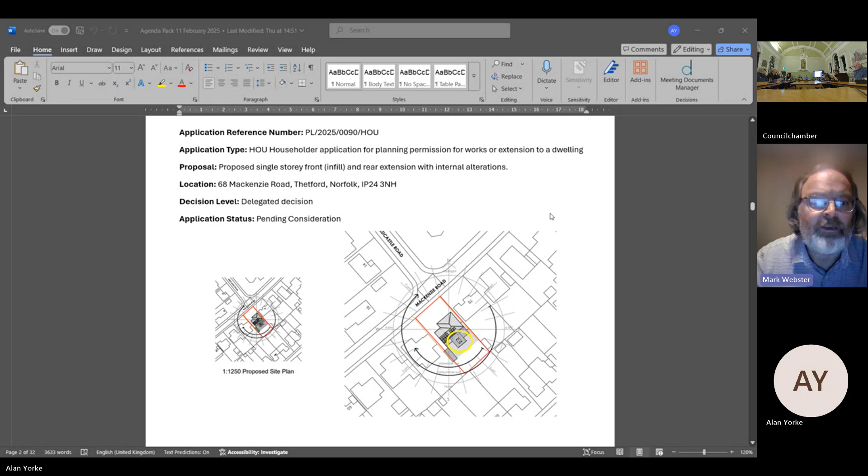Yes, please. So this one is 68 Mackenzie Road. It's a householder application for a rear extension and a small front infill extension, plus some internal alterations. If you are wondering what the round lines are, that's the sun apparently at different seasons of the year. So that's putting it into context there, Mackenzie Road, on the corner of Redcastle Road.

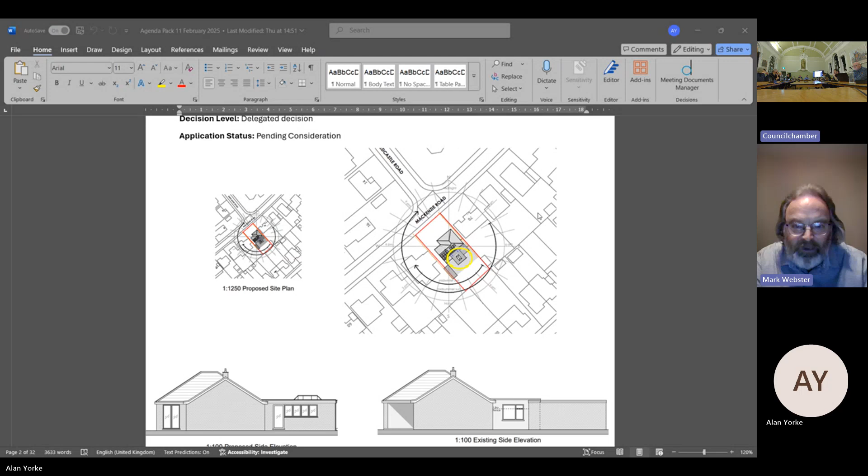If we can have a look at the first set of drawings - apologies, I've put the proposed on the left rather than the right as usual, so it's the other way around to what you're probably expecting. The ones on the right in this case are the existing status. Also, somewhat confusingly, the garage behind the house to the right seems to have disappeared from the proposal, but it isn't actually disappearing - the proposed diagram is in effect a section through the building, so it's not showing the garage, which would be in front of exactly where the cursor is.

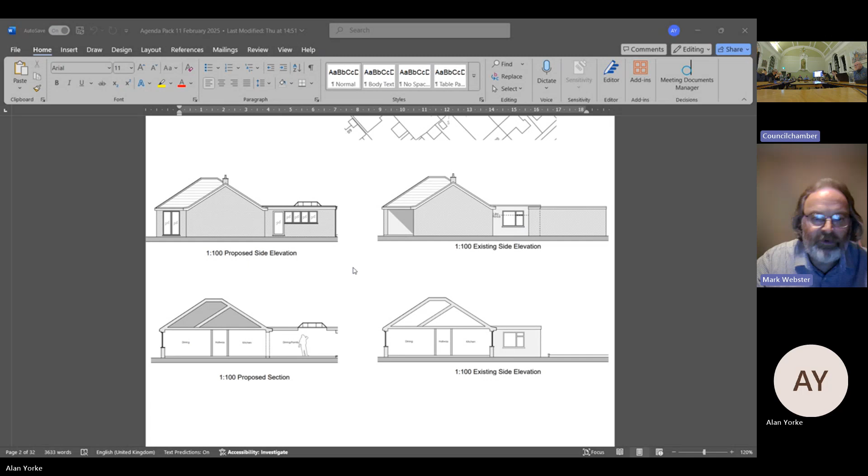So the extension there at that point is that bit on the right, and you can see the sections showing the proposed section with the larger extension on the back of the house, on the right of the left hand side drawing. Okay, if you're happy with that, we'll go on to the other ones, which are the right way around.

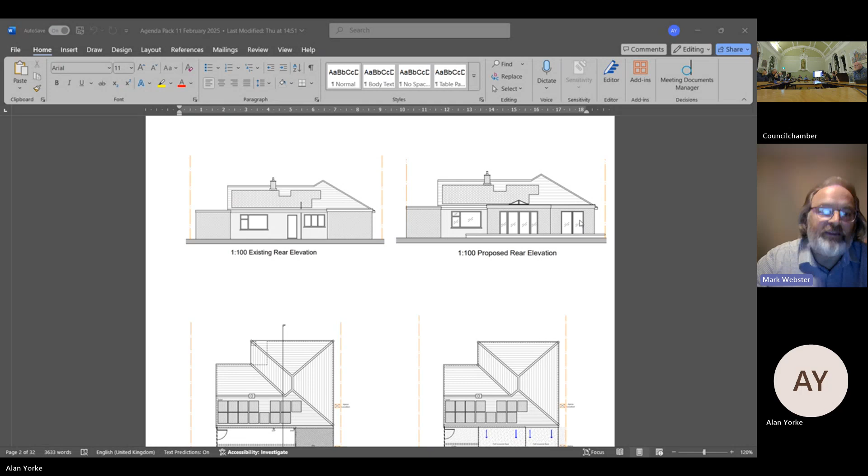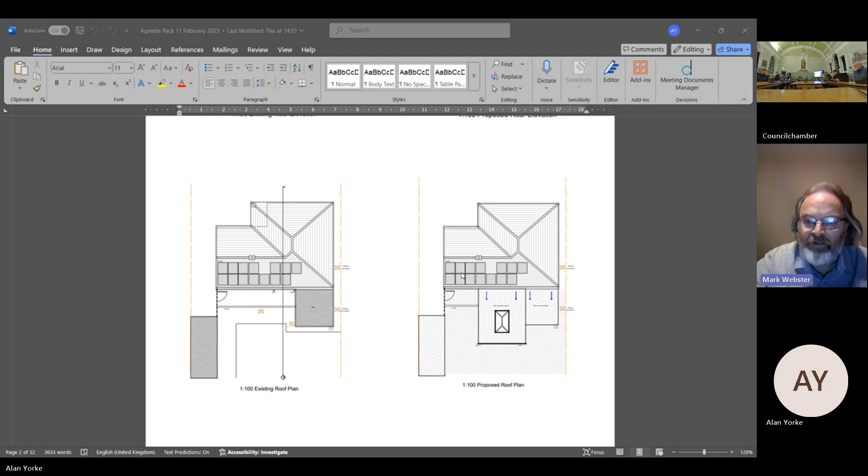If we go down to the roof view, you can see the existing extension - sorry, is somebody trying to say anything? Shall I continue? Okay. Sorry, it's just some interference or noise, I guess. So on the right-hand side of the square there's the existing structure or extension to the house, and bottom left the garage again, and it's the bit in between with the roof light on it that is the proposed extension.

So generally speaking, materials to match existing. The floor plan there, the bottom middle is the new bit, which is a family/dining room. So I think that may be it - let's just check if there's anything further. No, that's it. I'm back to you, Chair.

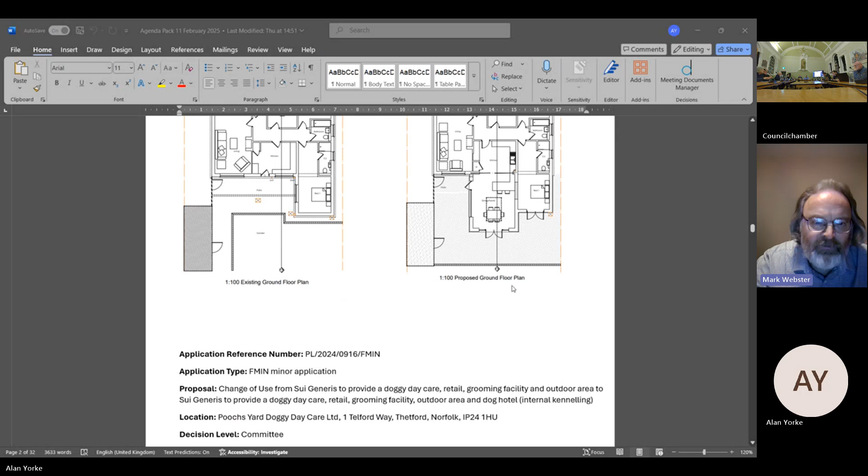0916. Thank you, Chair. So, this one is the doggy daycare centre.

It is a change of use in the sense that they want to be able to have dogs there overnight - dog hotel, kennelling facilities. It's worth noting this is going to committee at Breckland purely because they own the building, it seems. So it's a committee decision, but sent to committee because they own the building.

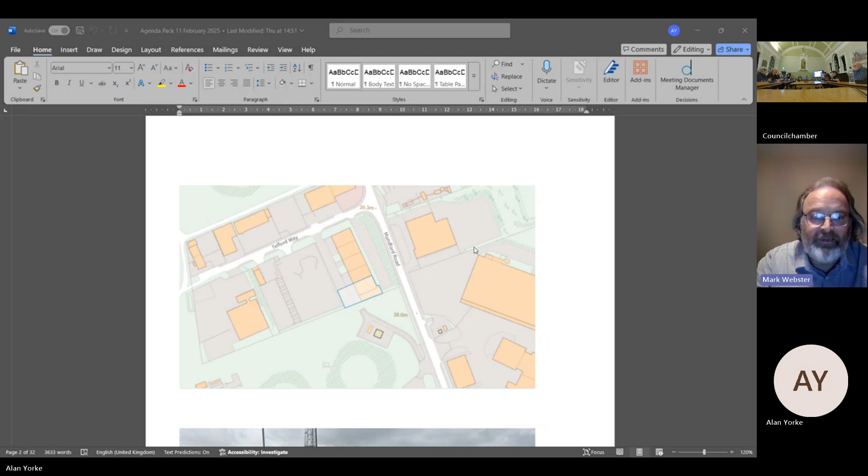This has been approved at Breckland already. Just to hold on that, Mark - apparently this has already been approved at Breckland. Oh, okay, so possibly not making a comment then. This is to consider for information, I guess.

Well, it's good information. I guess from a town perspective, it's great to see a growing business that's identified a gap in the market. But are there any other comments on that at all?

Planning last week, it was passed last week. Passed last week, is it? Breckland planning, yeah, it came up. Okay, thank you - I think just out of courtesy, we'll say we'll pass it as well.

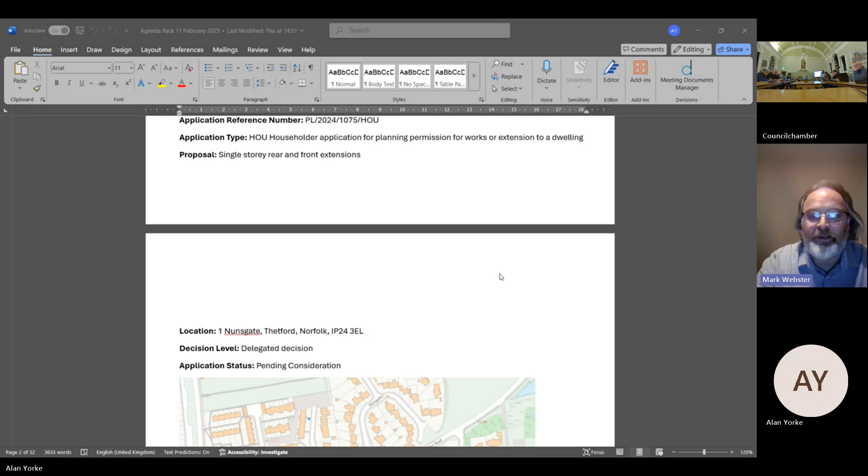Sorry, Mark, it's the number 1075. Thank you, 1075, yeah, okay, check. Yep, so this is back to a householder one - a single rear and front extension here, Number 1 Nunsgate. So this is basically a corner house.

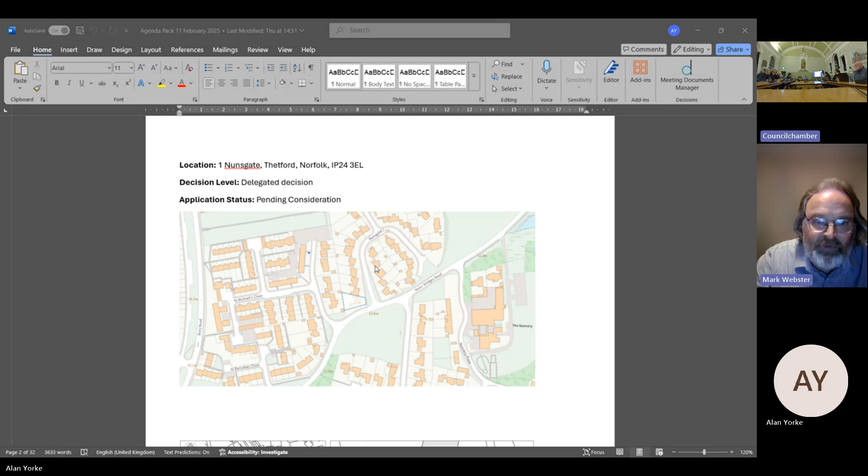So can we go down just to the map now? So the plot in question is again the blue area there on the corner of Nunsgate and Nuns' Bridges Road. If we could just go down to the next one, please - this one highlights the area in question.

Now the proposal is for the extensions marked in red there. So I'd ask you to note which way round things are, if you haven't already - the smaller front extension there is the east elevation or east side, and then west side for the rear extension.

The other thing to note at this stage is the tree to be removed on this plan, marked in red, that they are proposing to remove for the convenience of that driveway - that is the one with the tree preservation order on it. There is actually another tree to be removed, amongst the clump on the top left, and I haven't really been able to get a good picture view of that because it's in the corner of the garden. But we will see the tree with the tree preservation order that they are proposing to remove for the driveway a little bit lower.

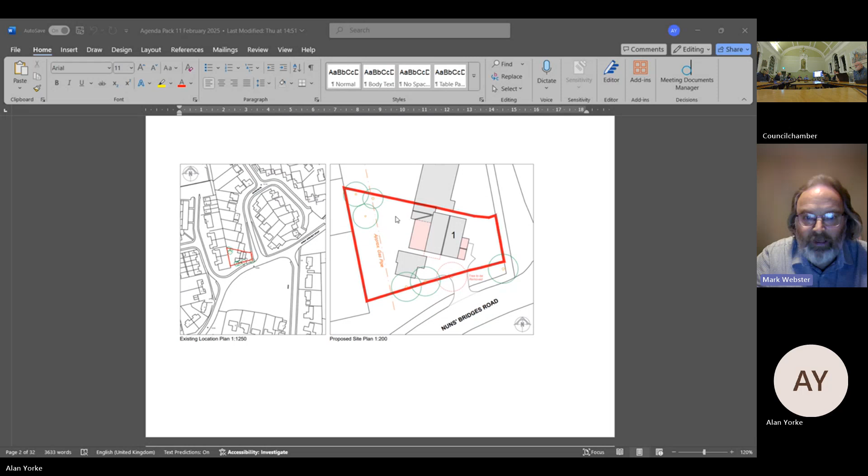So can we now go up to west, which is the opposite view, the back. This is where the larger extension is - again there's a roof structure right across the back there, exactly where the cursor is now. So that's showing the rear extension to the building. Let's go and have a look at north and south now - these are the sides of the building.

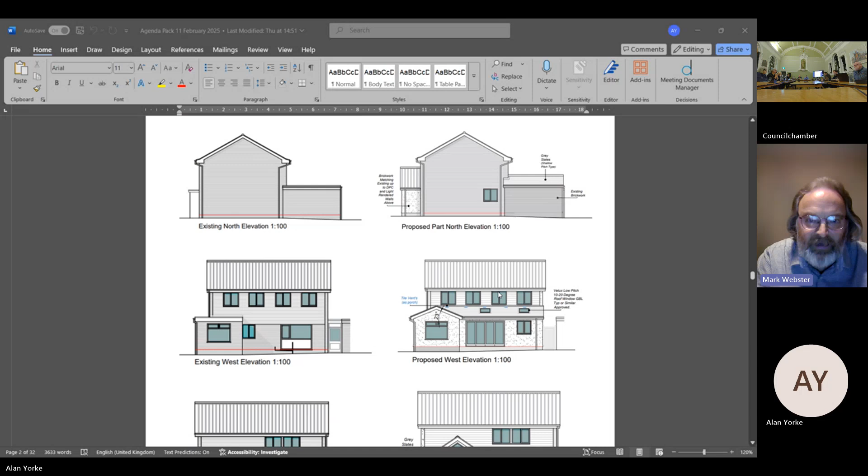So you've got your front there on the left, and if we have a look at south, you'll see it from that's the other side. Basically you've got the front extension on the right there, the porch, and the rear extension on the left going right across the back of the house.

Okay, can we have a look at the plan? At the top there you can see the existing layout with the garage sort of top left, and the existing extension on the top right. The proposal is to add in a bit all the way along the back, top left of the plans, and also add an entrance lobby at the bottom there of your picture.

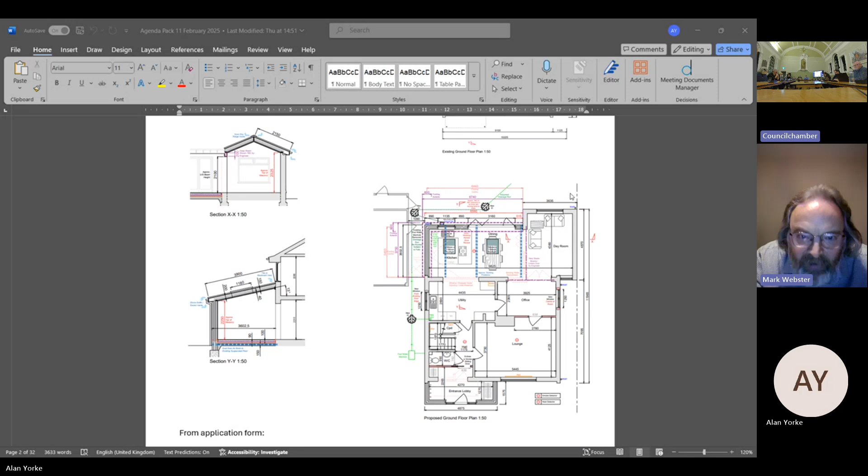Those sections there, you can see XX and YY. If you look carefully, YY is the rear extension, which goes across the rear extension, and XX goes across the top right section there. So that just gives you the roof sections basically of those.

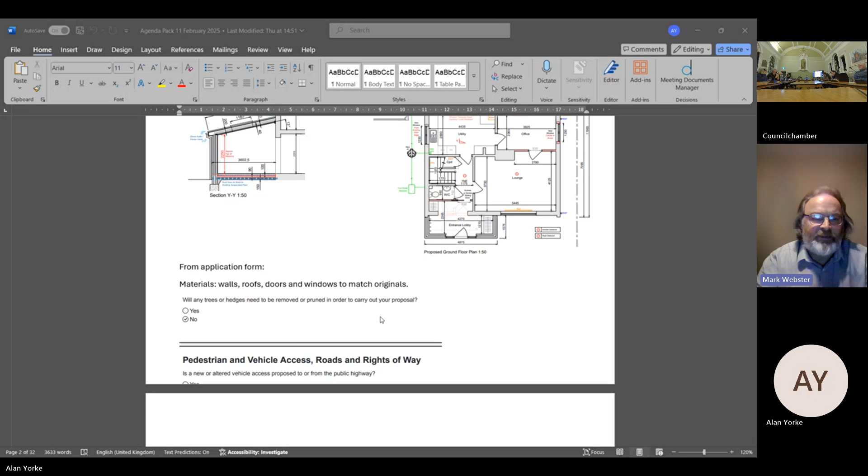On the application form, it asks whether any trees or hedges need to be removed or pruned, and they put no for this, which is rather confusing. I'm not sure whether that's a mistake, because it is basically a false statement as the planning application is currently submitted, since they do say they want to remove a tree. So I'm not sure whether that's just a mistake or an effective admission that it's not a vital part of the proposal. But it does say they don't want to remove a tree, though the details say they do.

Similarly, on the pedestrian vehicle access section, you can't see the answers, I'm afraid, but they're saying no alteration to that, though there does appear to be on the plans some alteration, in the sense that it's being moved to the area across where the tree currently is. So it is moving slightly. Highways have not got an objection to this.

On the applicant's own tree report, the proposal is to remove trees 2 and 7. Tree 2 is the one in the top left of the garden as we saw on the plans, and tree 7 is that one. Tree 7 is the pine tree that we circled in red, which has a tree preservation order on it.

They've listed their reasons that at some point in the future this may cause problems for the building. They also say the branch of the pine tree is touching the house, or one of them is, and it might cause a problem for the driveway at some point. The tree officer, however, is not in agreement with their report, and simply says he's unable to support this because it is a tree preservation order protected tree. I think that's everything on this. So back to you, Chair.

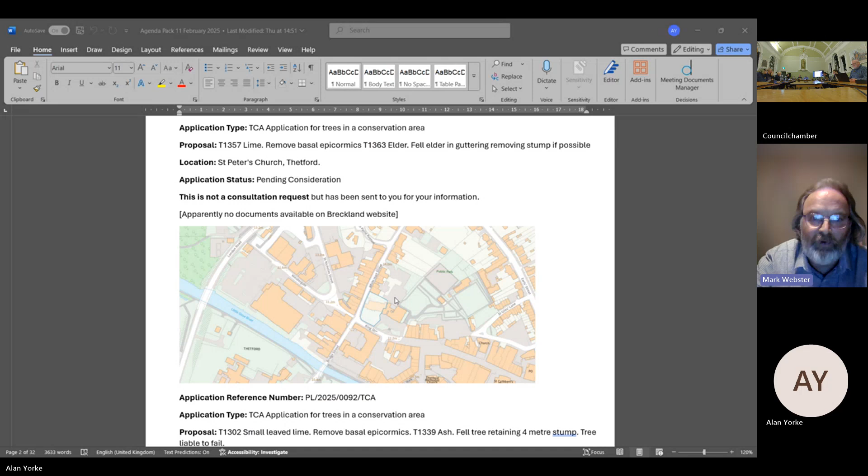And the elder, as it says, is in the guttering, so that locates it quite well. If anyone's not familiar with it, basal epicormics is that kind of bushy growth from around the bottom of a tree where it's been damaged by strimming around the base - it sends out lots of tiny little shoots. So it's basically removing those shoots from around the bottom and removing the elder from the guttering. Do you want to ask for comments, Chair? As I say, you're not allowed to actually influence this as such, but if you want to discuss it, over to you.

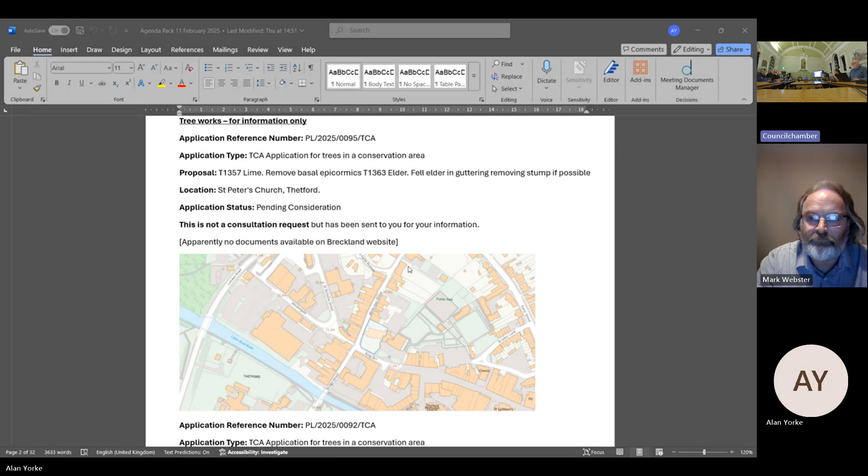Just for completeness, I think we'll give each one individually a thumbs up or down if we can. So on that first one, are we quite happy? I would, no objections. Thank you. Okay Karen, thank you.

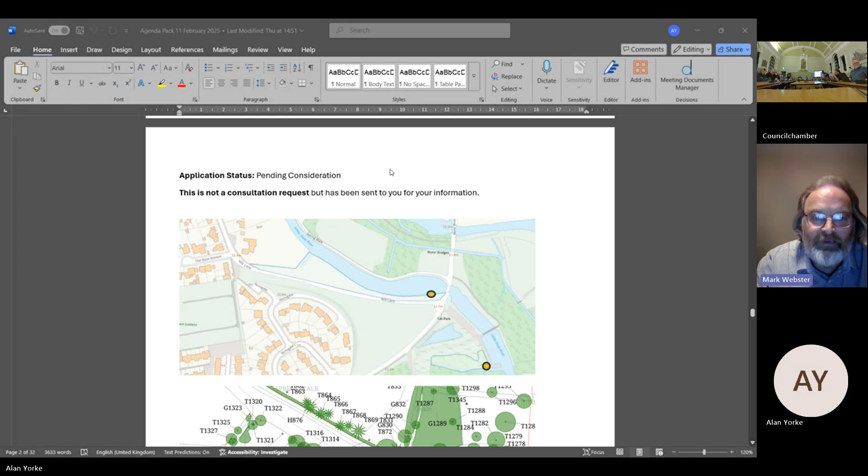Next one is Spring Walk, so you've got two here - another lime tree removing the basal epicormics. Can we just go back a second, Alan? And the other one is an ash which is to be felled leaving a 4-metre stump because it's liable to fall. If we just go down to the map - the one right near the actual bridge is the lime, and the one by what some of you will remember as the old swimming pool is the ash.

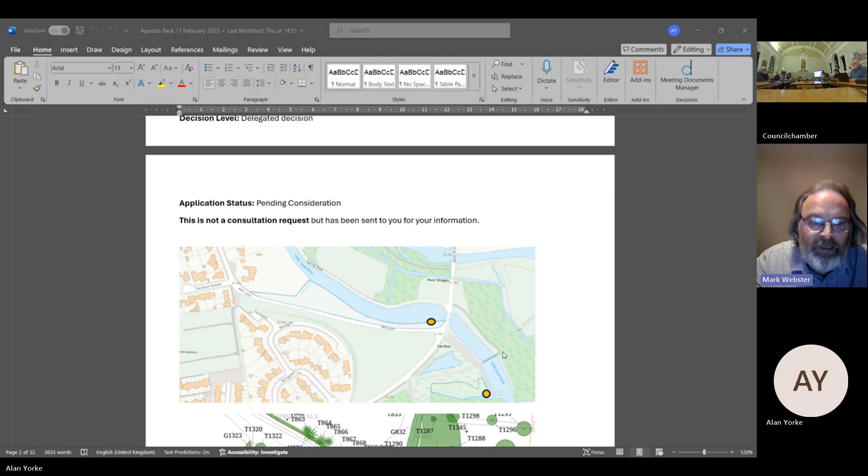So if we go down to the tree plan, that's the lime marked in orange there, just right by the one nearest to the bridge. This is from the tree safety report - the top one there is the small-leaved lime epicormic growth, and if we go down a little more, you'll see the ash, as I said, by the old swimming pool, and you can see it's got die-back throughout its crown, so they're recommending a 4-metre stump fell. Over to you, Chair.

Any comments at all? No, everyone's quite happy. I would make one comment, and that is we've lost a lot of trees down that walk. Each time we lose one, I'd like us to see if we replace it, not necessarily like what we lose, but something more suitable to the environment. I'd like to make that comment because otherwise we just lose so many, particularly down Spring Walk. Is that okay? Yeah. Yes. Okay.

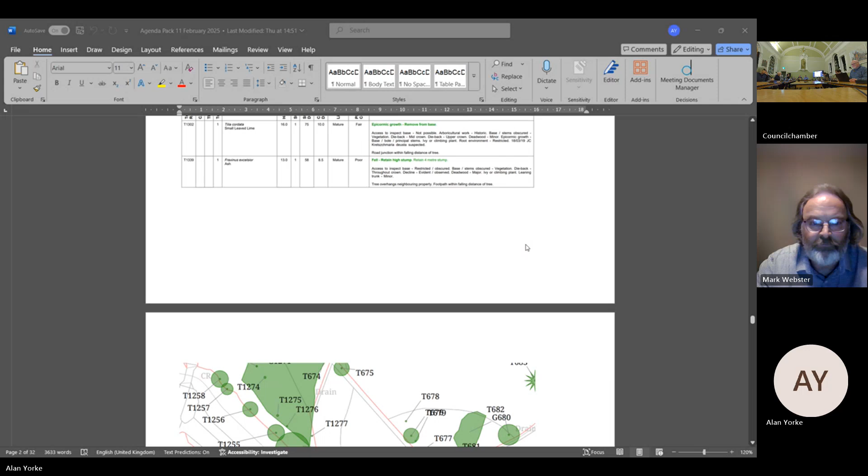Back to you, Mark. Well, yeah, sorry. So if we just go back to that picture, because that does show the lime tree by the bridge, and that shows quite clearly the epicormic growth. We're looking at the stuff around the bottom. So this isn't a fell in this case. The ash, however, is a fell, and that's off the road, so I'm afraid I wasn't able to get a street view picture of that one. But if we go on to the next one, if we can.

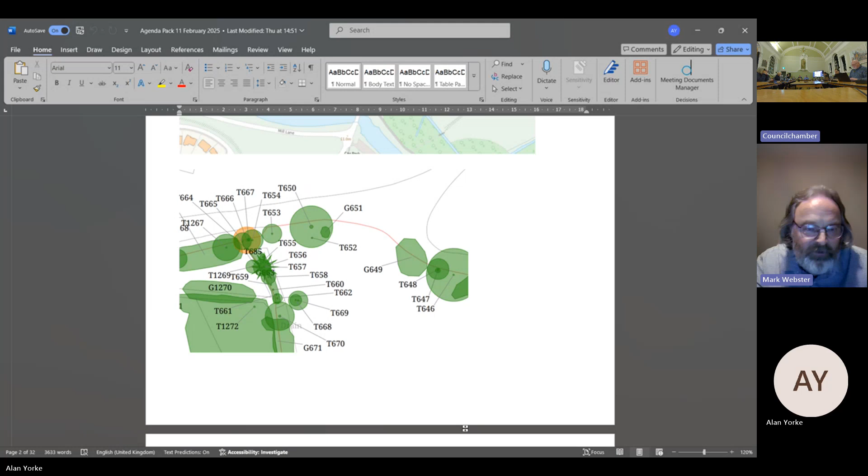So this one is Ford Meadow, and you can see it's just a little blue square there. We're talking about the south bank of the Thet in this case, rather than the Ouse, and it's basically opposite the care home there. We'll go down to the tree plan, the next diagram. It's just showing the one in orange there, near the river. It's quite difficult to get the context from that, but hopefully the previous map tells you roughly where we're talking about. If we go down a little bit further, in this case it's just epicormic growth. Back to you, Chair.

Any comments? No, I support that. Thank you.

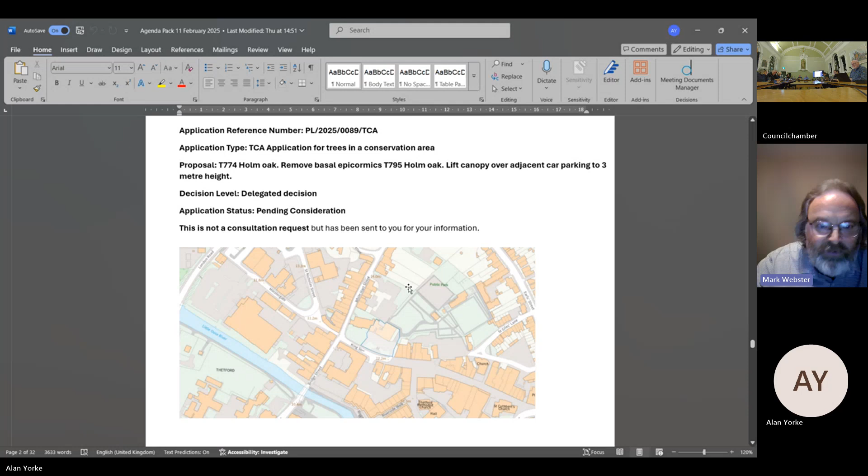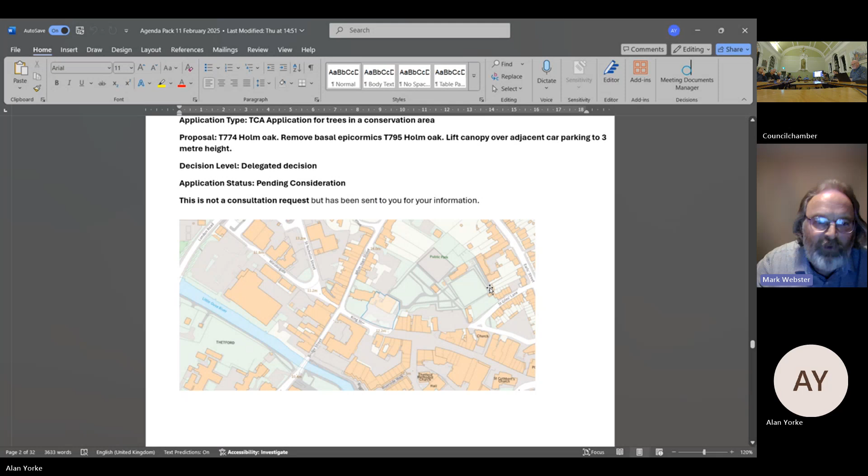Okay, so another one here, and in this case we are talking about King's House. There are two trees in question, both holm oaks, one just behind the building and one in the front car park right adjacent to the shop. If we could go down to the next? Is there anything further on this? I can't remember whether we got any.

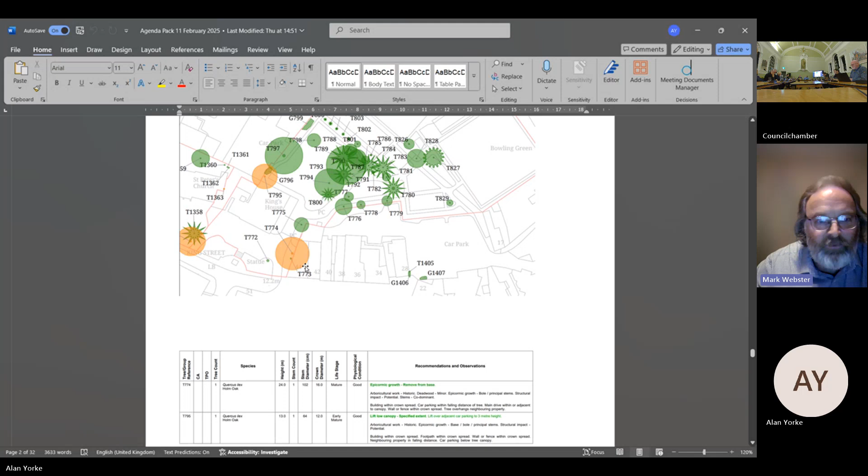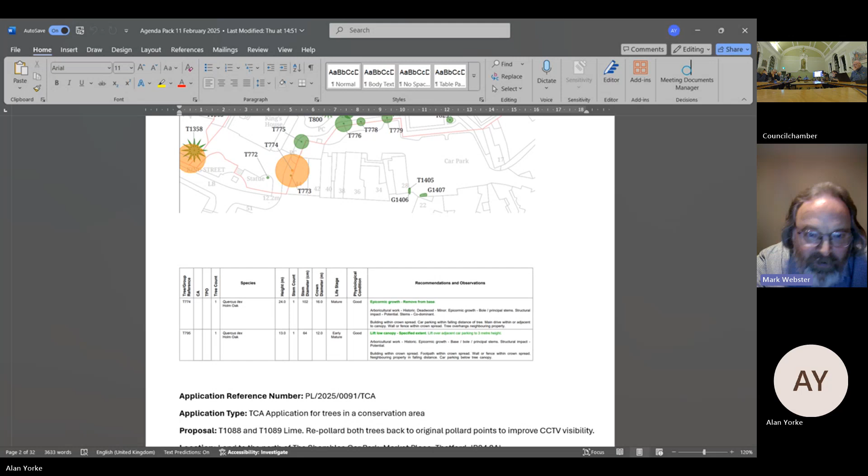Yeah, so we've got the orange ones there. 795, just above King's House, behind the building, overhangs onto the White Hart Street car park. Then the one at 773, bottom right, is the one right up against the wall of the neighbouring shop. That picture also shows the lime next door in St. Peter's churchyard. So in this case, 774, sorry, the one by the shop is removing the epicormic growth, and the one behind King's House is lifting the low canopy, taking off the lower branches to increase the height of the crown. I think that's all we've got on that. Back to you, Chair.

It seems like sensible maintenance of 2 oaks. Any comments? All happy to support?

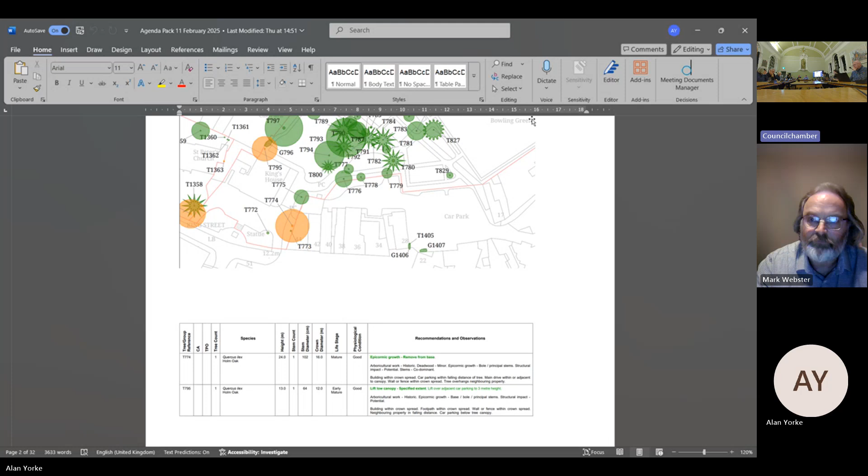Oh, sorry, can I just check, Mark, from a planning point of view, tackling the epicormic growth, is that purely because these are TPO'd? If they weren't TPO'd, would they be able to cut that back without going through a full process? Yeah, it does seem rather bureaucratic overkill. I think it's because they're in the conservation area, so pretty much any work, in theory at least, should have a planning application. But for just removing these little regrowth stems around the bottom, it does seem rather over the top for it to be a planning matter, I should say.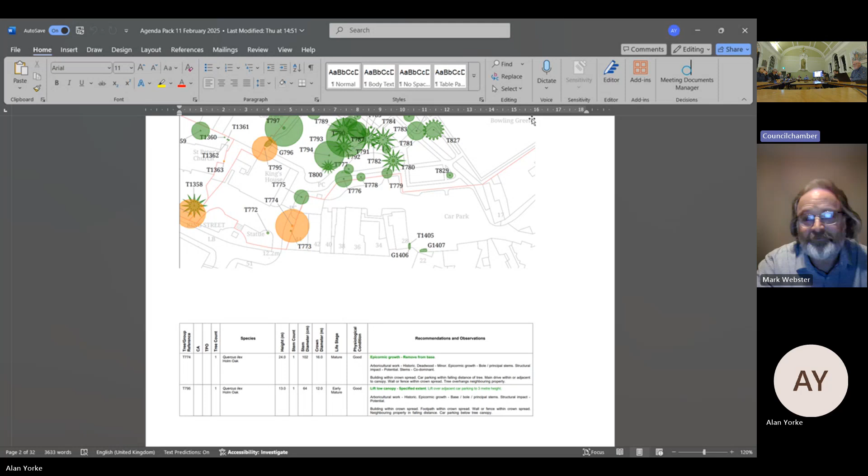Expensive. Okay, if we're all happy, we'll support that. I think there's one more.

Well, there's actually one more Thetford one, Thetford Council one, which is the marketplace car park. Basically, there's a couple of limes that they're suggesting to be repollarded to where it's been pollarded previously. Is everyone familiar with pollarding? It's cutting back the branches to the stem, basically, and it'll regrow from that point. Again, because I can't see the documents, I'm not sure exactly which two, but you know where it is, and it's supposedly to improve the CCTV, so you can probably work out which two it is from that. Back to you, Chair.

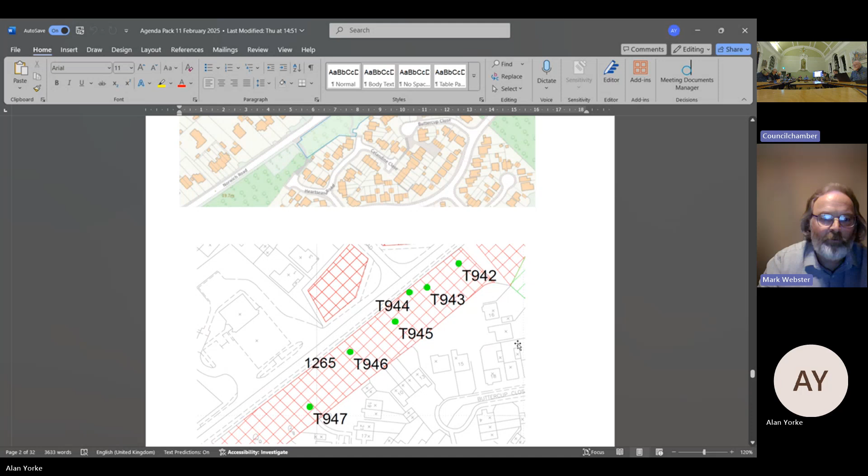You can see basically they list the reasons for the works in each case. The only comment I'd make is there seems to be a number of cases where they fell tree to the ground, and I'm wondering why they're not reducing to 4 meters, which in one case they are, and on one of the previous ones near Nuns Bridge, as it was. So that one's being reduced to 4 meters, but a lot of them are fell to the ground, and I'm not sure why that is particularly. If the tree is dead, they obviously want to reduce it to a safe level. I'm guessing these may be next to well-used footpaths, but from the plan and the information I can't be sure unless anybody else knows the site in detail. Back to you, Chair.

Thank you, Mark. The whole area runs along the side of the Norwich Road and is interwoven with footpaths, so that may have some implication. There are also beech trees which are different, I'm not sure if that has any bearing. But I would make the one comment from my point of view, which is lots of trees being taken down and not being replaced. It's good to see some maintenance happening there because it's been left overgrown and unkept for a long time.

So are there any comments at all we'd like to add? Are we content just to note that there's no notification of new trees being planted? Happy with that? Thanks, Mark.

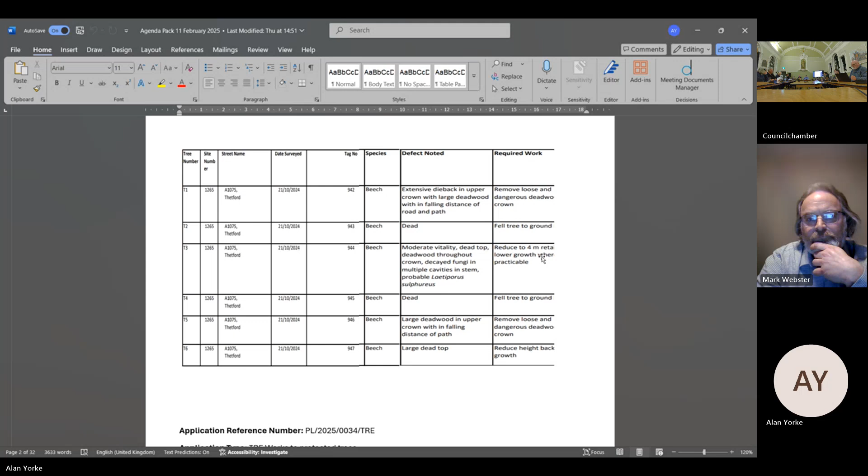Okay, and quite a similar one coming up. Again it's a batch of works here. So if we go down to the area map, you can see the area in blue and indeed red, which marks the trees. So we're further up the road, approaching Tesco's at this point. Similar basically reasoning and actions in this case.

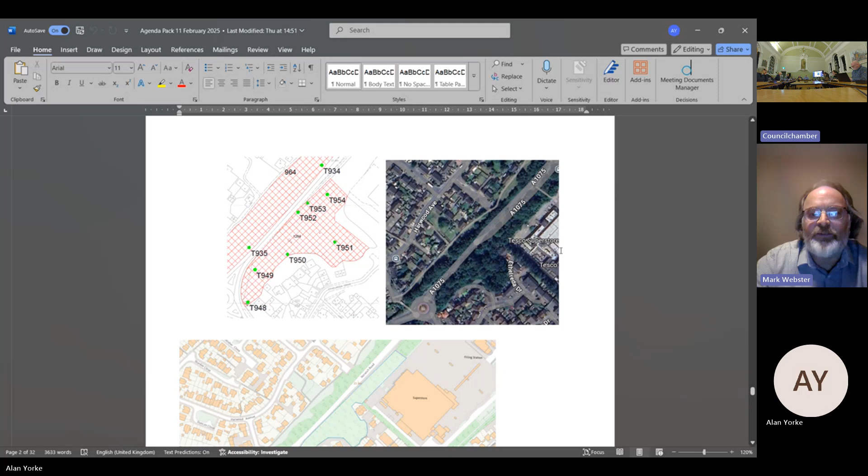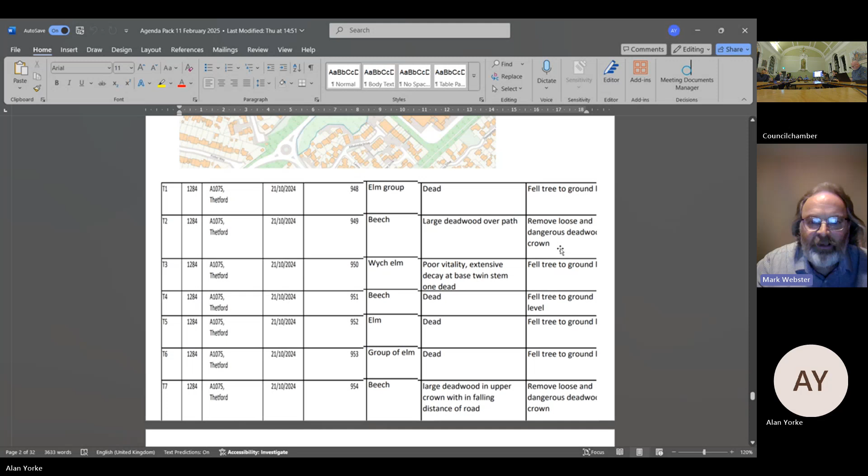On the subject of replanting, it may be they're working on the assumption there should be natural regeneration within the woodland, perhaps. But if we go down to the actual pictures, again it does seem to be a lot of fell to the ground in this section, rather than perhaps retain some of the standing dead wood. Back to you, Chair.

Okay, pretty much the same. Any comments at all? Agreed, this is fine. Happy? Okay, thank you. On to the next one, thanks, Mark.

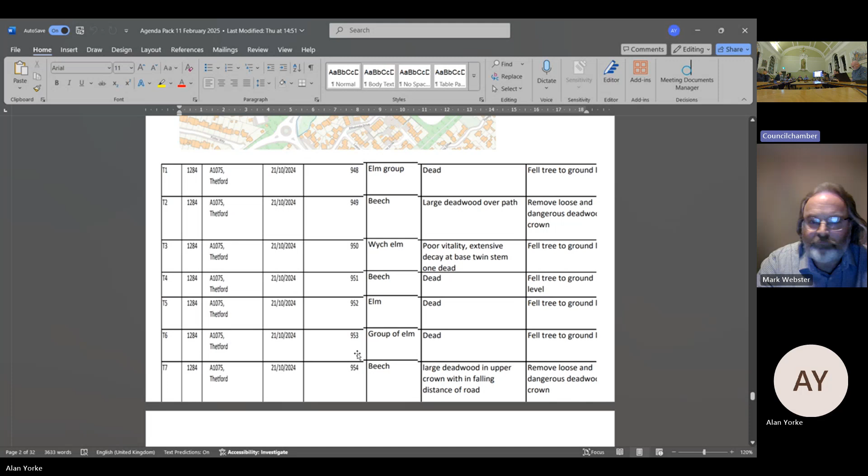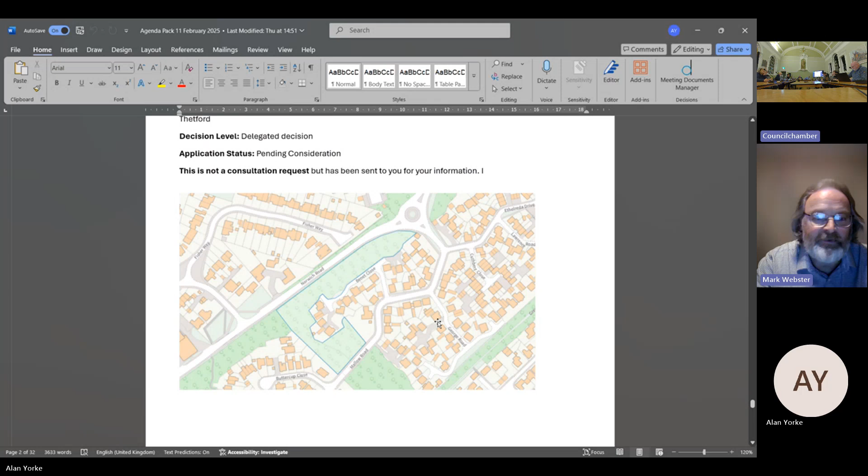Again, as I said, it's going to be very similar. Another section of the woodlands along Norwich Road. That's the area in question in this case, and we can go down to the pictures, which is probably the relevant place to look. Again, there are a couple, well at least one there that's reduced to 4 meters, so there is some retention of the dead wood for insects and so forth. But you can see again a lot of them with large amounts of dead wood in the upper crown.

And beech, as you quite rightly pointed out, is a particular danger of unexpected falls. So nothing further on that from me. Back to you, Chair.